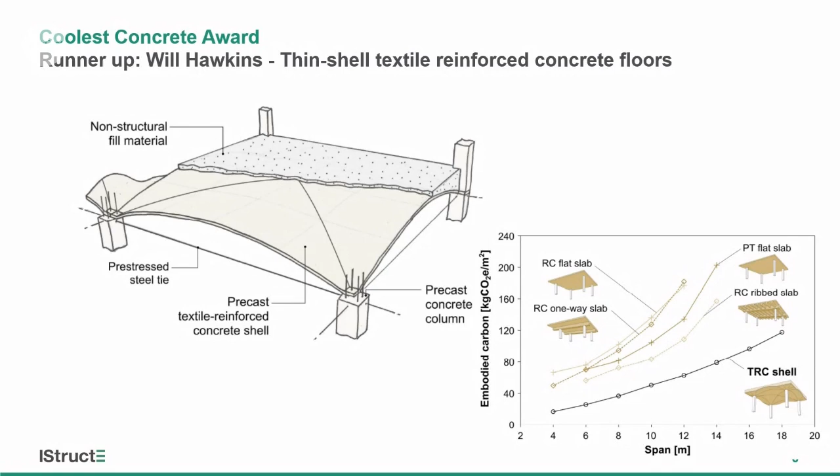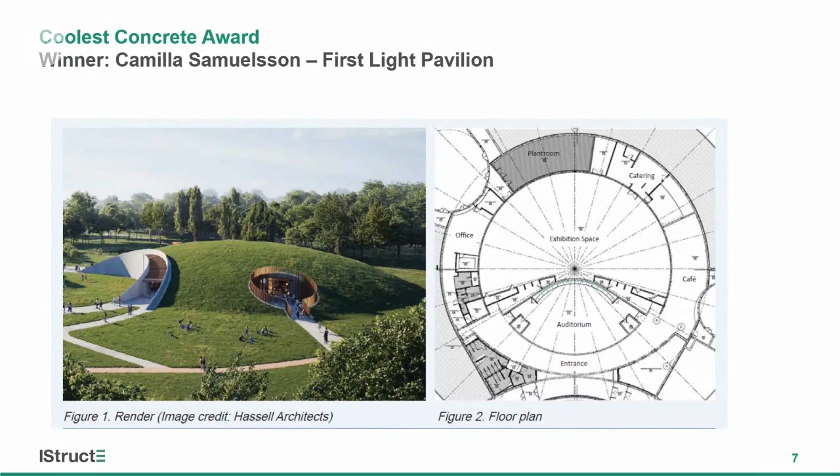So the next one up is the winner, and this is Camilla Samuelsson, and she's won for her First Light Pavilion at Jodrell Bank, which is a really exciting project, and I'm looking forward to hearing about it because Camilla is our first speaker this evening. She's a project engineer for Atelier One, where she joined in 2016, and before that she got a master's in architecture and urban design and a master's in structural engineering and building technology from the Chalmers University of Technology. So well done her. I'm now going to hand over to Camilla to talk about the First Light Pavilion.

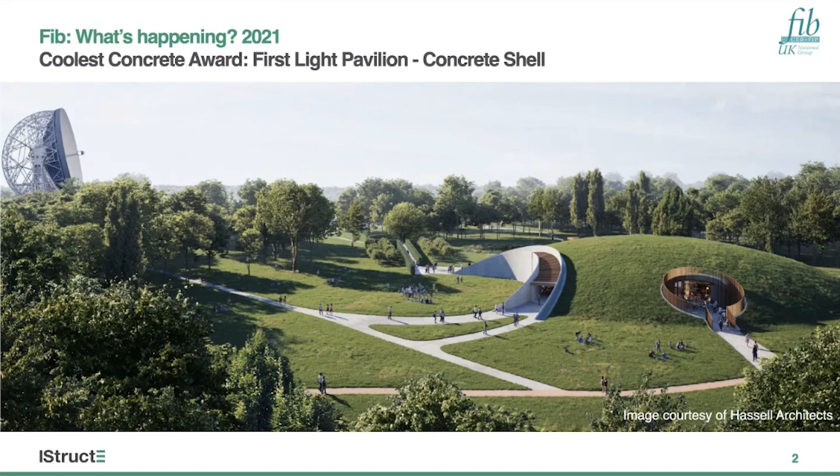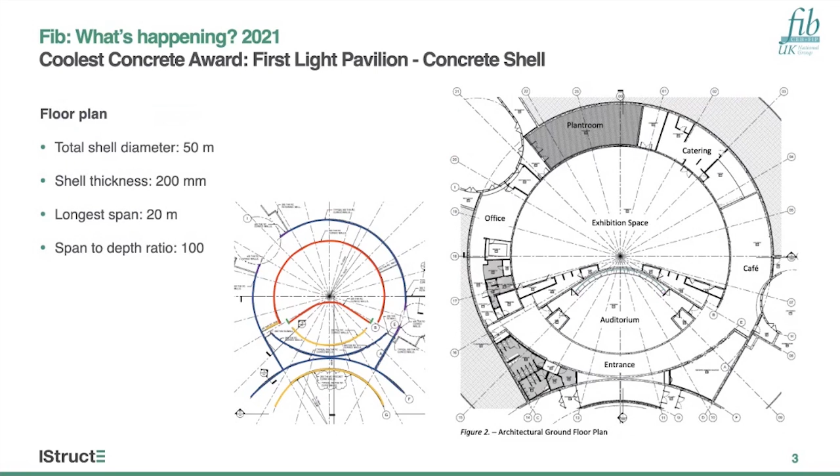Due to planning regulations, the curvature of the shell had to be quite shallow, which resulted in large thrust forces at the edges. Unfortunately, the soil conditions were shown to be quite poor, which meant that we couldn't put any horizontal force on the foundations, and therefore buttress walls were also not an option. Instead, we worked with the circumferential reinforcement in the edge of the shell and the top of the wall to create a tension ring. And we also made use of the internal walls to help with the loads.

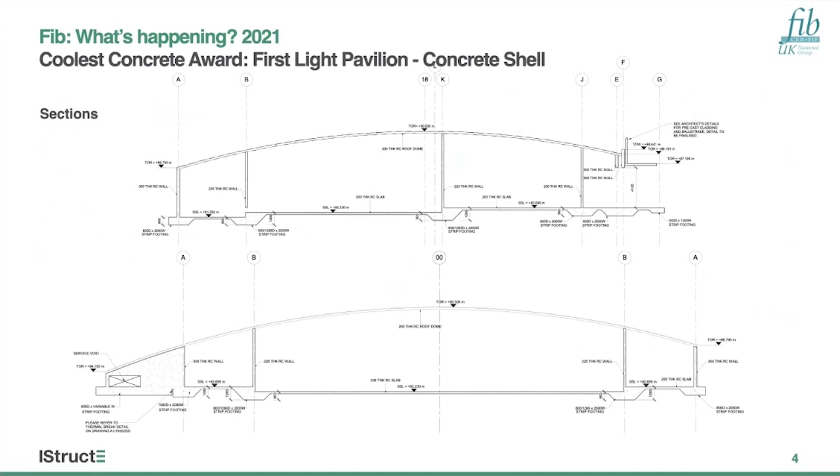And in these diagrams, you can really see the slimness of the shell in relation to the span and also the shallow curvature. The shallow curvature itself, together with the internal walls working as supports, was a major challenge in this project, since it meant that the shell was working partly in bending, partly in membrane action. And in this diagram, you can see the principle of the shell action versus slab action, and also how the circumferential walls were working as ties around the building.

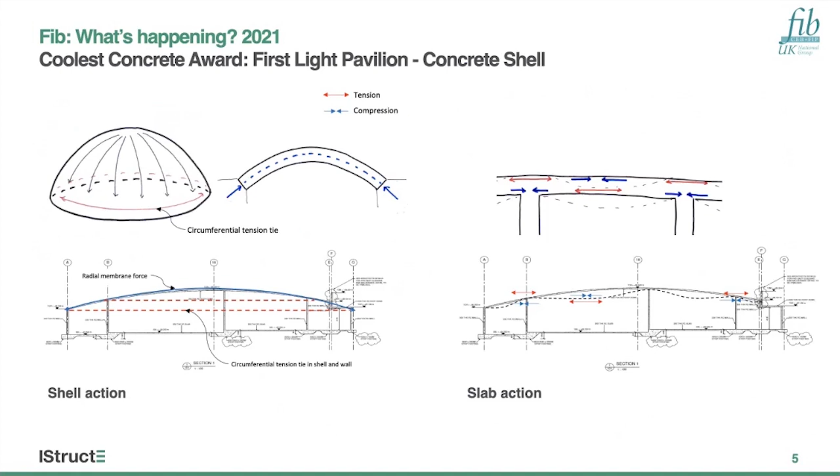To fully understand the behavior of the structure, a quite complex nonlinear analysis method was required, mainly to fully understand how much it's working in bending and how much in membrane action, but also to understand how the stiffness is affected by cracking and nonlinear material behavior. And we were collaborating with, among others, Nick Nikitas from Leeds University on how to model the structure. And we also got a lot of valuable advice on the material behavior from Tony Jones at the Concrete Centre.

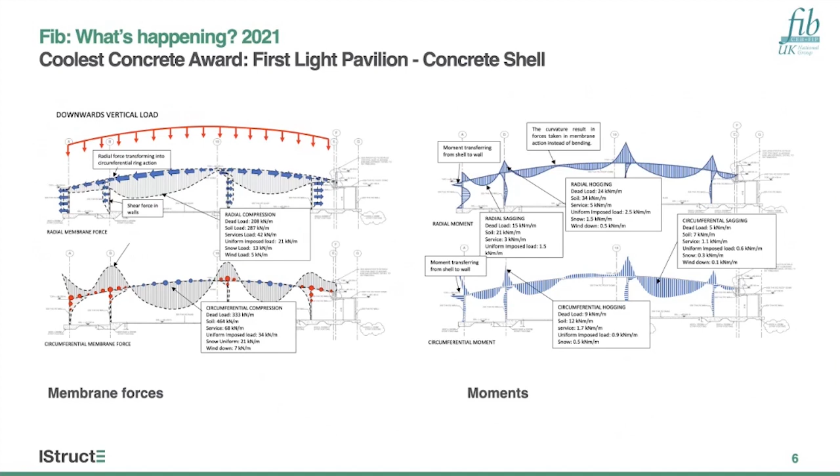And in these diagrams, you can see the force and moment patterns of the shell and where we find large tension, compression and also moment peaks. We analyzed the structure in two separate software packages, Midas FEA and Autodesk Robot. Midas has the possibility to take nonlinear material behavior into account by automatically considering cracking, but it's quite heavy software and normally used for smaller extracts of a structure and was not fully suitable for a large-scale model like this.

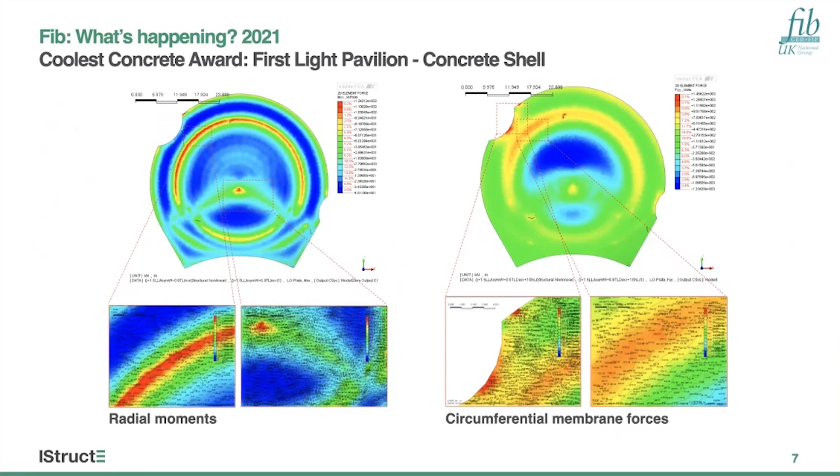Robot, on the other hand, does not take nonlinear material behavior into account, but it works well with large structures and it's relatively fast. So we made use of a method where we analyzed different design options and verified changes, first in Robot, and then we made a final verification in Midas and also local detailed checks. To be able to make as efficient a structure as possible, the reinforcement was divided into multiple reinforcement zones based on the moment plots and the membrane force plots.

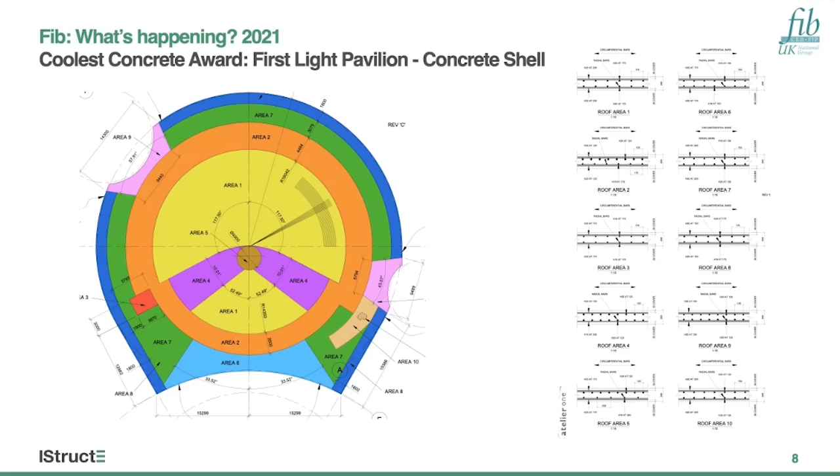And one of the advantages of using concrete for this project was that reinforcement can be added exactly where it's required by adjusting the reinforcement layout, thereby avoiding using unnecessary material. Since the shell and wall had to work together as a tension ring at the edge, this connection had to be fixed and movement joints were not possible. To verify that we wouldn't get excessive cracking from shrinkage, we made sure that the soil would not provide significant restraint to the foundation. And we also made use of the waterproofing to reduce the friction, basically working as a slip membrane to allow the structure to shrink as a unity.

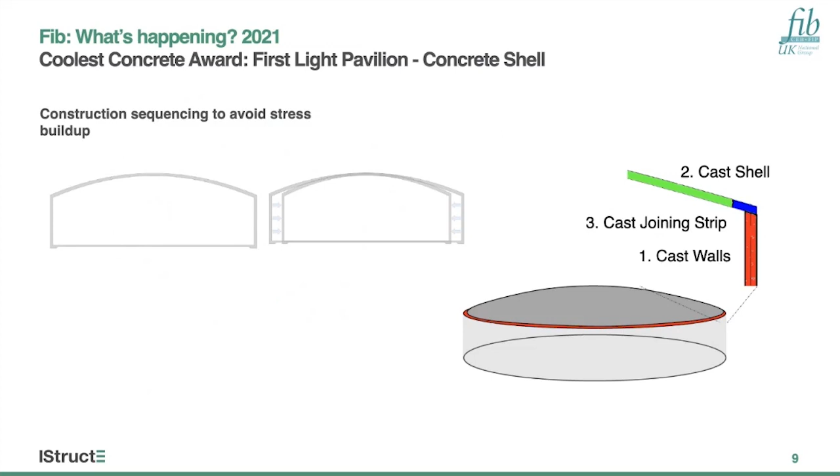And to avoid excessive cracking during casting of the shell, we adopted a method where the main part of the shell was cast first, while leaving a strip at the edge to be cast at a later stage when the main part of the shell would have had the chance to cure and shrink independently. Making use of the curvature made it possible for the shell of the First Light Pavilion to be very thin, since a load path in pure compression and tension is a lot more efficient than a load path in bending.

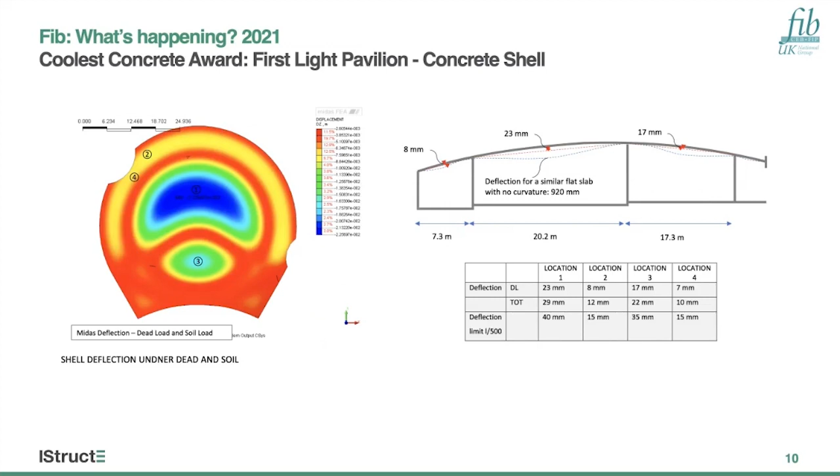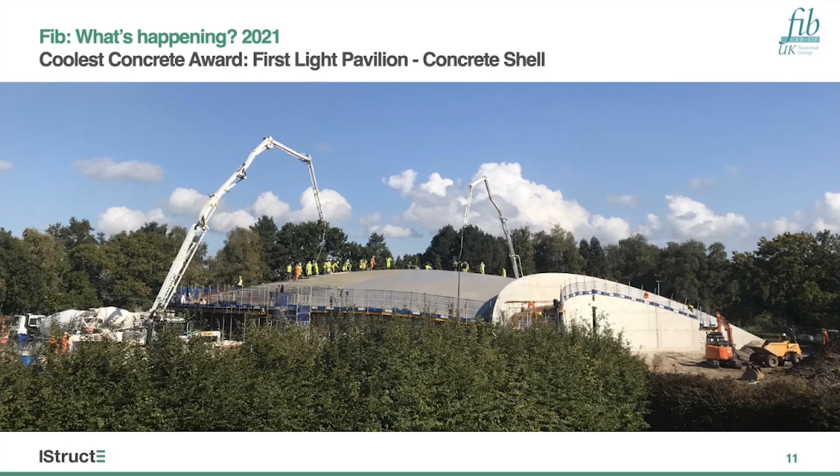And finally, I would just like to show some pictures from site. And this is from when we went to visit in the autumn when they were casting the shell. And it was very interesting to see the full logistics and the complexity of the whole thing, since the shell itself had to be cast in one single pour. And here you can see how they are pouring the concrete onto the formwork.

Overall, it was a very interesting project to be involved in, and also a quite complex one. And I learned a lot in the meantime, both about material behavior, about new softwares, and also about shell action.